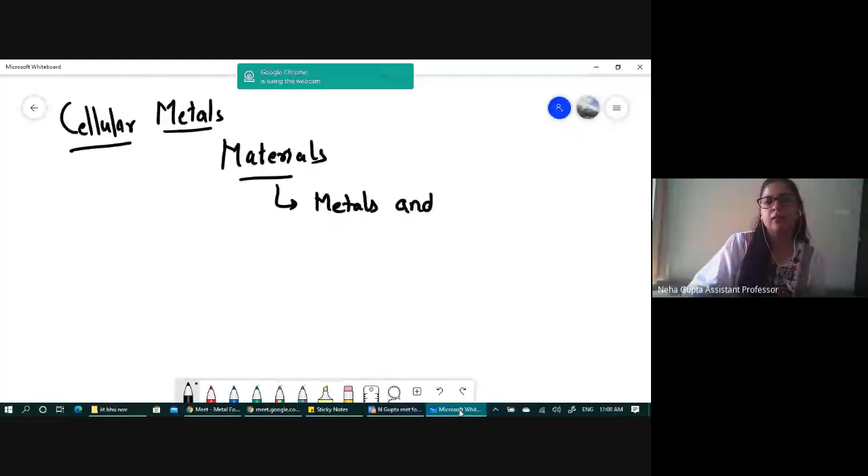So students, currently in this lecture, we will be discussing foams and lattice materials. So in material science, if we look at categories, right? So if we look at different materials, we broadly classify them as one is metals and alloys. Then we can work with ceramics. Next category can be polymers. Then can be composites.

And recently, from the past 20 years, since new and new materials are coming into picture, there are several new categories added to it. For example, semiconductor materials. Then you can do smart materials and many more. So now I'm focusing in this work on metals and their alloys. I do not know how many of you are working in the field of metallurgy, but even if you are not working in this field, still I think this lecture will be helpful for you.

And what I'm going to do is, during our discussion on these foams and lattices, I will be giving you a brief idea what we are doing at NIT Raipur and what my UG students are doing. For example, if I'm telling them that you have to develop a foam, with what kind of ideas they are coming to me and doing their project works. Okay, so all those things we will be going to discuss.

And if you look at metal foams, what is being found, especially in India, I'm not telling about across the world, because across the world the term metal foams is widely used, but people are only limited to research labs as well as academic institutions. Only we are working with metal foams, not on industrial level or in daily life applications. For example, you will be aware that we are using polymer foams in packaging, in household, all those different foams we are using, but not metal foams.

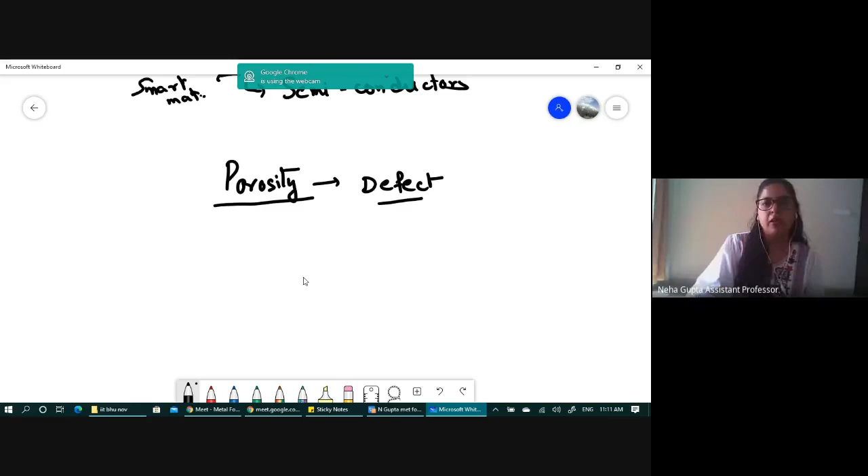So currently, if you work with material science, we use the term porosity. And if you look at the word porosity, we say it is a kind of defect. This is a common term. But now, in this lecture, I will be saying that porosity is not a defect for me, it is an advantage for me. And why am I saying that porosity is an advantage? Because nature is motivating me to work on a porous structure. Okay, let us look at some of the examples that we find in nature.

So there are basically three types of nature structures that we will be discussing in today's lecture. One is sandwich structures, next one is density gradient structures, another one is tubular structure, which is having a cellular core. So let us first understand what are sandwich structures. In sandwich structures you are having a top layer and a bottom layer, similar to your bread sandwich. And in between these two layers, you are adding some core material. So this is your sandwich structure.

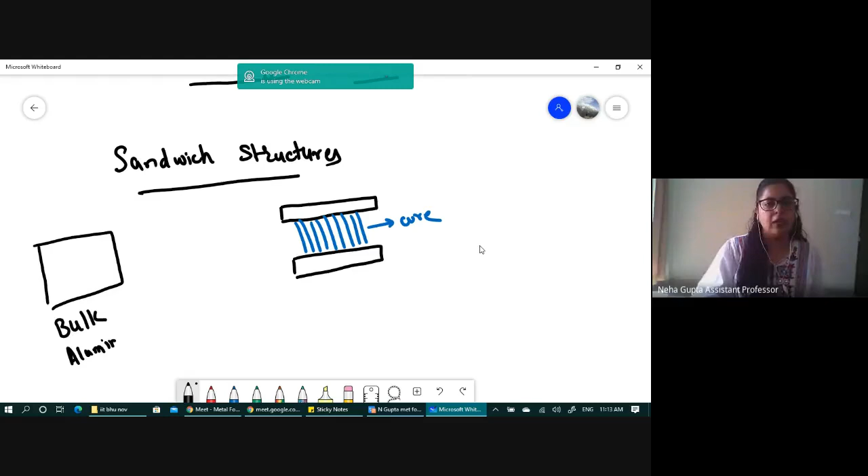So why was this sandwich structure developed earlier? Let us say you are working with a bulk metal. Let us work with aluminum, because aluminum is commonly used in market. In your household also you will find aluminum metal. So if you work with bulk aluminum, let us say its weight is some X gram. Now, rather than using this bulk material, I'm using only two plates. So I'm turning my bulk material into two plates because I want to reduce the weight further.

So what people have done initially, to decrease the weight, they wanted to use just a two plate structure. But the problem was that if you take these two plates and apply some load on this structure, what will happen? Your structure will get easily bent like this. So it means its bending strength is very poor. Though I'm decreasing the overall weight, the bending strength will decrease and also the overall stiffness will decrease.

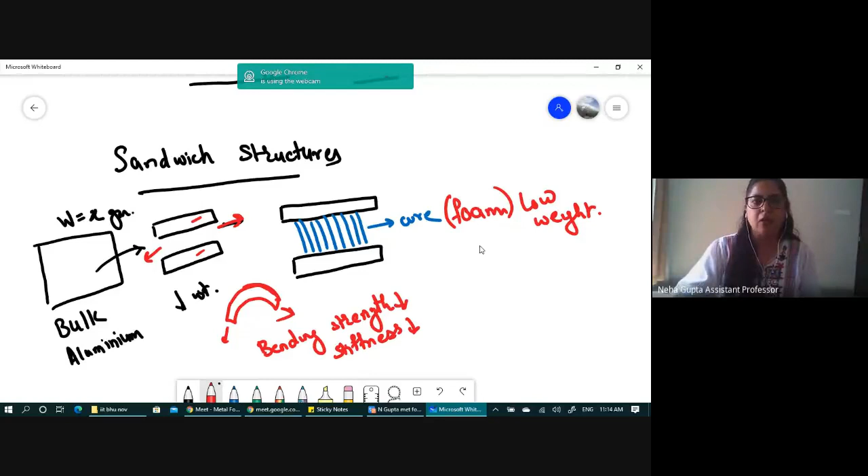So what was the solution to it? To introduce a core material here. So now in between these two plates, they have introduced a center material. This core material is generally a foam, very low weight. We will see in coming slides why we are saying it is low weight. So this core is not increasing the weight drastically as compared to your bulk material, but it is giving support to the top and bottom layers so that you can increase the bending strength and the stiffness, as well as have lower weights. Okay, so this is the advantage of using sandwich structures. So this is one structure that we will be discussing.

Another structure is density gradient structures. So density gradient structures are

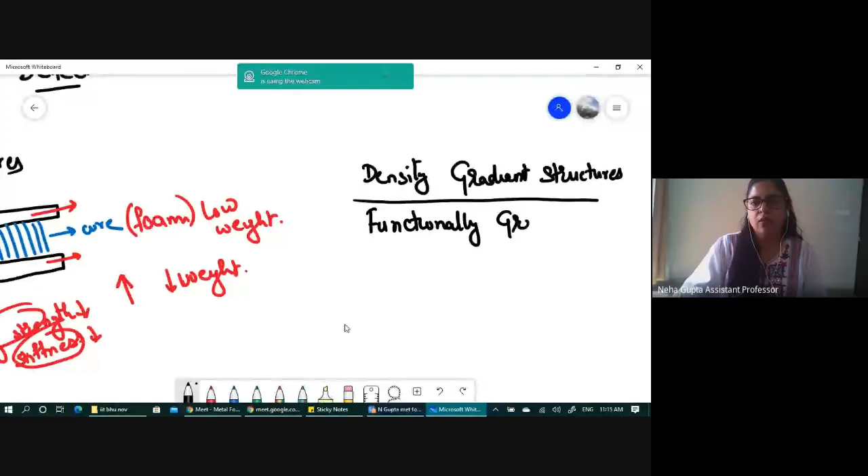So for density gradient structures, currently people are generally working with functionally graded materials, commonly known as FGMs. So in density graded materials, suppose this is your structure and let us divide this structure in three parts. In the first part, let us say the mass is 10 grams. Here you want a mass of 50 grams. And here you want a weight of, let's say, 1 gram. You want to change the density across a single structure. Those kinds of structures are termed as density gradient structures.

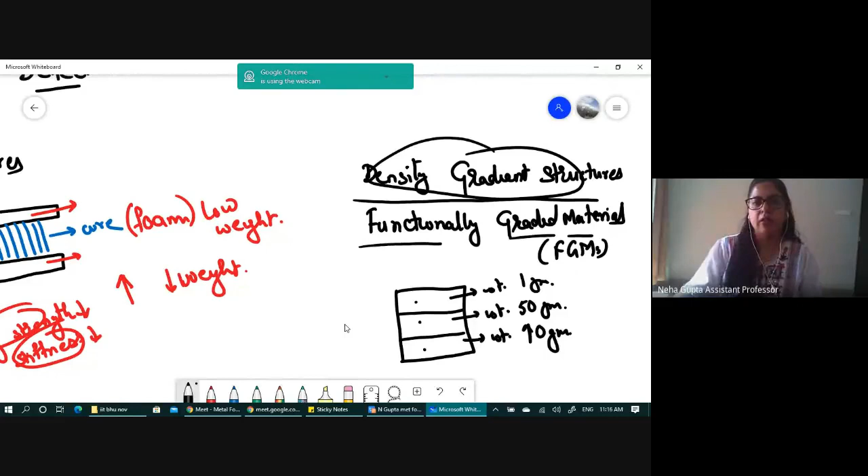Clear? And you will appreciate that as you are changing the density in these three parts, obviously their function will also change. So in a single structure, you are changing the functionality. So many people use the term functionally graded materials. All right. So this is the second category of materials that we will be discussing. Next is tubular structure, tubes. So let us say you are working with a pipe. This is a tube.

And this tube will be having some core material inside it. So these three natural structures we will be discussing, and we will see how nature is intelligent enough to manipulate the structure to get a particular functionality. Right?

Because what is the property of a leaf? There are different kinds of weather, summers, winters, springs, and all those things. Winds are blowing, sun is there. So this particular leaf has to take care of all the different kinds of heat, pressures, velocities, and it has to resist it. And this kind of structure will help this leaf to get that kind of property.

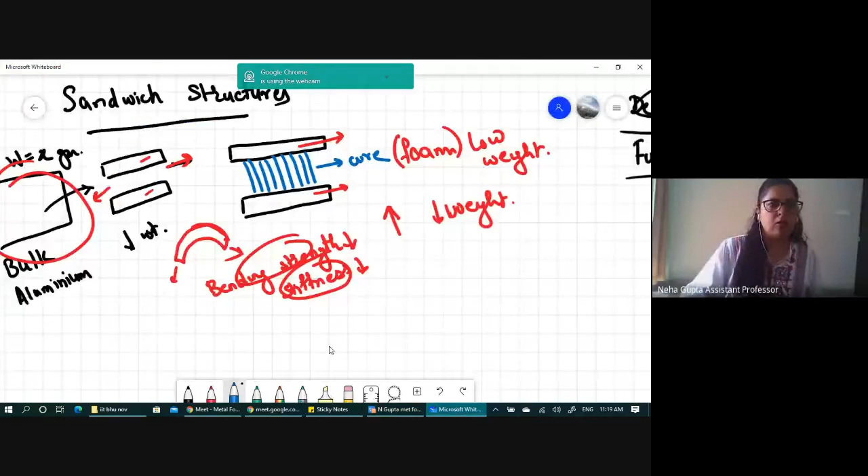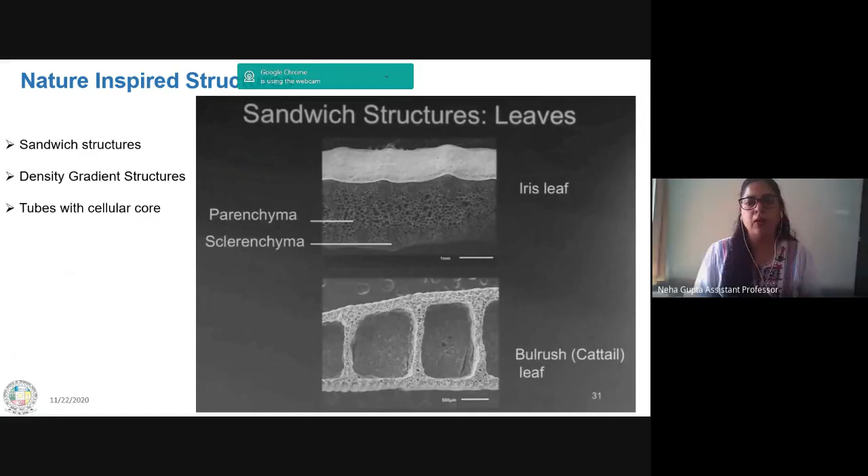So what we are doing, we are engineering our porosity. Nature is engineering the porosity to give a particular function to a material. For example, if you're working with a bird, the first thing the bird has to do is fly. And for easy flight, its body weight has to be very low.

And how to decrease the body weight? Make the structure porous, hollow. Okay, but if you completely remove the material, there will be no strength. So how are you doing the strength enhancement? By creating these kinds of beam structures or struts.

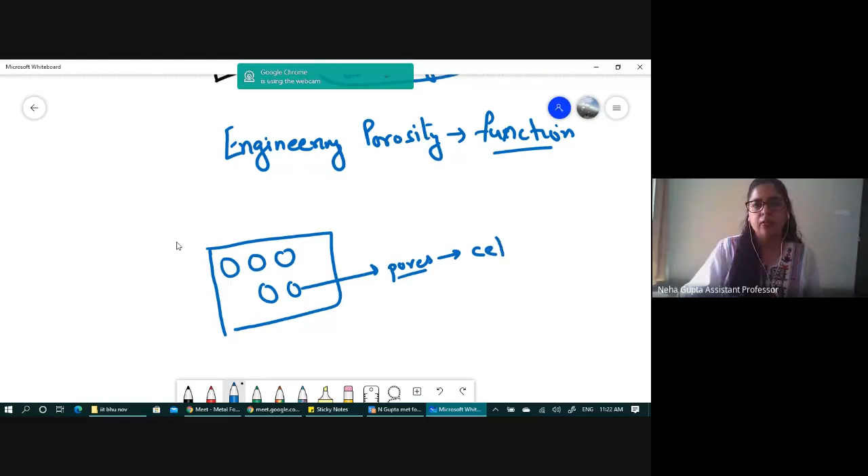Okay, so as we move forward, let us say this is our material that we want to develop. And in this material, if these are my pores, okay, rather than using the term pore, I will use the term cells. In engineering terms, I'm representing pores as cells. Now, these pores can have different shapes. They can be circular, triangular, rectangular, square, different kinds of shapes, or hexagon also.

Right? So simply what I can do in a given structure, if this is my overall structure, I can arrange my cells or porosity like this. These are my square cells. Okay, or you can use triangular cells or hexagonal cells. And the boundary, this boundary, we will call it as strut.

You can compare it, for example, you are constructing a building. Okay, so this is the bottom floor of your building, and this is the first floor of your building. Now you can easily appreciate that there might be some beams that are connecting first floor with your bottom floor. Okay, why? To give a particular support to the system. And in this building, this is the same strut that I'm talking about.

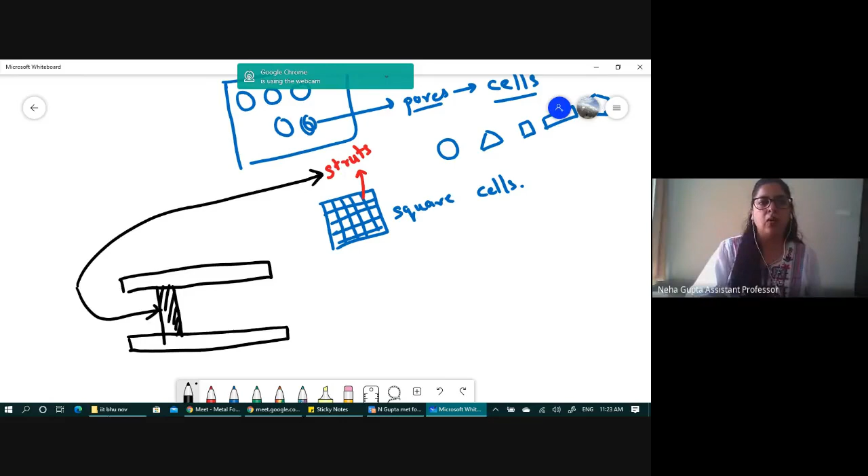To give a particular strength, you are creating some beam-like structure. And this one, this is another beam. And in my term, this is my one single cell. I hope it is clear to everyone. Right. All right.

Here the cells that are arranged are completely different as compared to that of your pigeon, because the functionality of an owl is completely different as compared to your pigeon. Owl has a different hearing capability also. And you are manipulating your material so that you can change how the sound is affecting or how the sound is entering your head.

Okay, so if you look at the skull of an elephant, it will have different kind of structure. So like that, nature is taking care of different kind of structures. It is manipulating the structures to give a particular function to that particular creature, whether it is plant, whether it is pigeon or any other mammal.

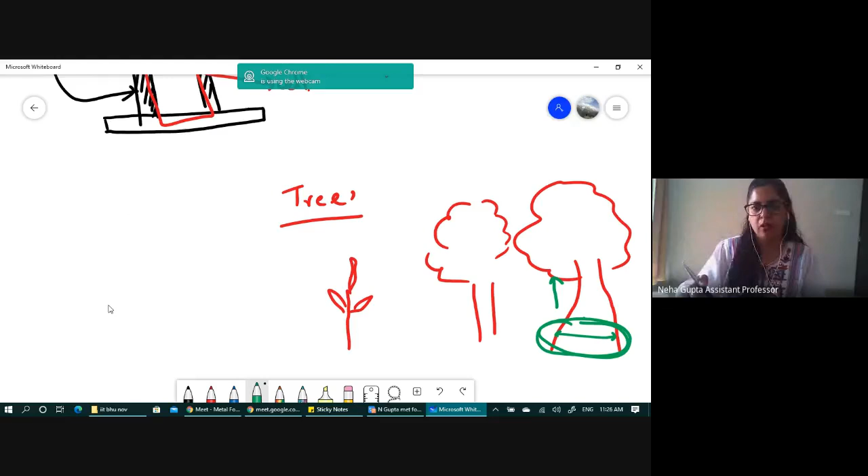Now what will happen if you are taking a palm tree? Okay, the bark of this palm tree, you will find it is completely straight. From bottom to top, it is not taking this kind of shape which I have shown. Rather it is taking this kind of shape, and here are the leaves. And why it is not getting this kind of trunk? Reason being, this tree is manipulating its cell structure. Let us look at it.

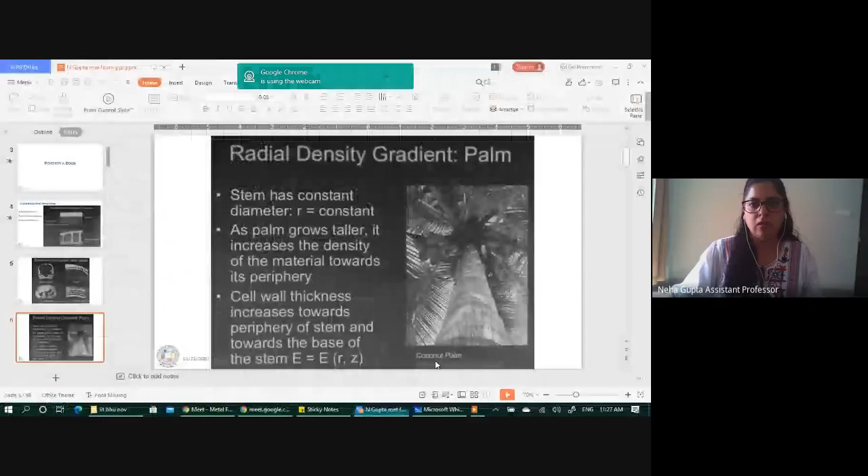So this area is old, this is your new area, right? Because the growth is happening in this direction. So I'm comparing this structure with the new structure or young structure. So what palm tree is doing, rather than increasing the size of its trunk, it is increasing the size of its strut or boundary of the cell. Here the boundary is less in the young plant, and here the boundary is more. So like that, it is accommodating the weight, and it is not increasing its overall structure.

That's why the palm tree is like this. Okay. I hope it is clear. What is density gradient? So here in the top area, density is different. Okay, because the strut size is small. This is the boundary. And here in the bottom area, the density is more. It means the strut dimension is more. This boundary area is more. Clear? So these are the examples of density gradient. So nature is already taking advantage to create different kind of structures. Okay.

Now this is an example of tubular structures. So now let us take an example. There is a glass of water, and in this glass of water, you are sipping it using some straw. This is your straw. Now you will take this straw and simply bend it. What will happen? The straw will take this kind of shape after bending.

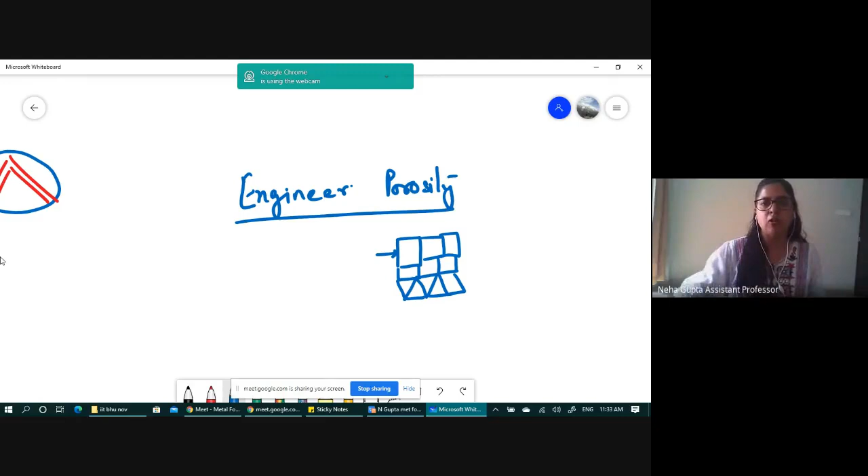When I talk about engineering of the porosity, it means whatever cells I am creating. For example, this is a cell. So let us say I'm working with one kind of cell structure, it is giving me some property. I can always modify another layer of cells like this, or let us say like this. Right? We see it in engineering applications. In many civil applications, they are taking care of different cell shapes to get a particular strength of that particular construction that they are doing. The same thing we have to do on a smaller scale, on the scale of our materials. You have to arrange your atoms somewhere here, something like this. Okay.

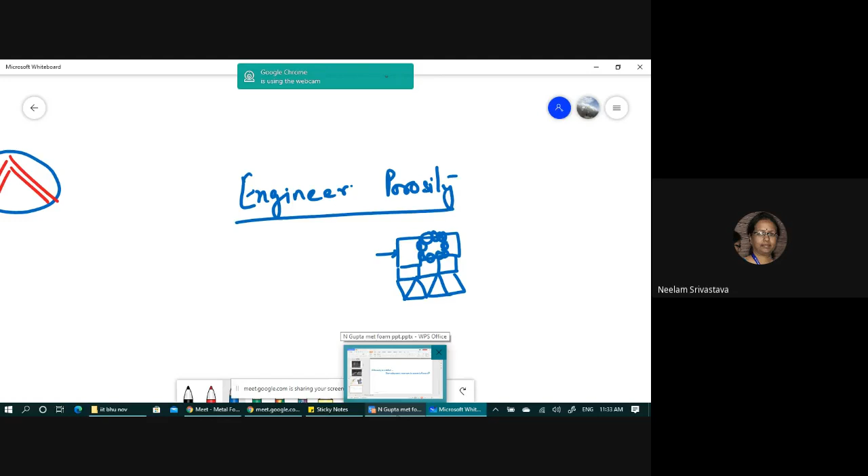If there are any questions related to whatever we have discussed, we can take it now. And next we will. Actually, we have requested, sorry. Let me. We have requested the students not to interfere in between because this video is on YouTube. Okay. So they will ask the questions at the end only. Yeah, sure. Okay.

So now we understand that porosity, we have to simply engineer it. And now people have engineered this porosity and they have developed engineering cellular solids. Okay, so there are two categories of engineering solids. One is honeycomb structure, another one is foam structure. So in honeycomb structures, there is a regular arrangement of these cells. For example, this is a regular arrangement of hexagonal cells. Here you have a regular arrangement of square cells. Here you have a regular arrangement of triangular cells.

But in comparison, foam has an irregular arrangement of these cells. So this is one of the major differences between honeycomb structures and foam structures, right? So what we have done, we have engineered the porosity, and now people have developed two categories of materials. One, they are calling honeycombs, another foams. And these honeycombs have a regular arrangement of cells.

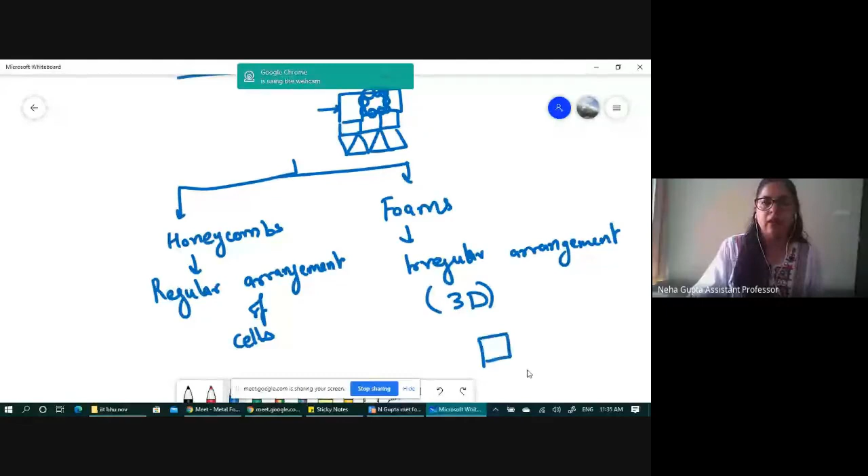And in this, you are having irregular arrangement. And another thing that I want to add here is these foams are 3D structures, meaning they have length, width, as well as depth. Okay, and these honeycombs are 2D structures. Now, when you turn your 2D honeycomb structures into 3D, we call them lattice structures.

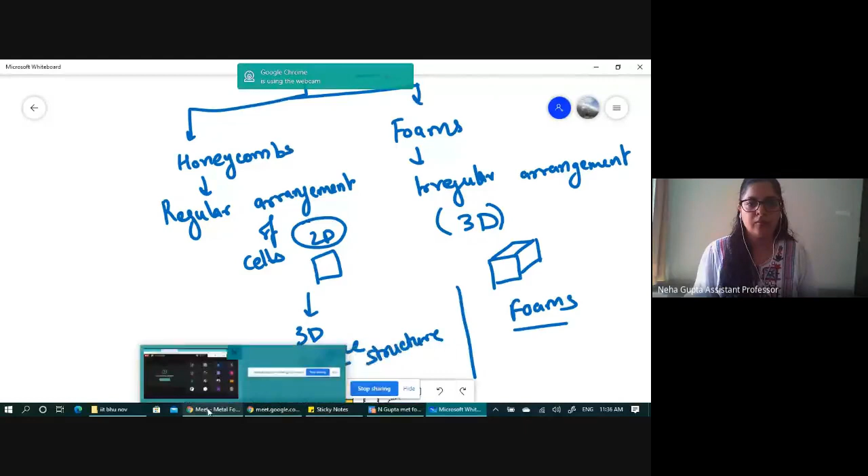Clear? So this is the major difference between foam and lattice materials. Foam, irregular structures; lattice structures, regular structures. Clear? All right. So you can follow this reference. I have taken this slide from work by Lorna Gibson. She is faculty at MIT and she is working with cellular solids. So I have taken these examples from her work only. So you can refer to this reference to understand more on this one.

All right. So now we have understood that cellular solids are of two different types: honeycombs, which can be turned into lattices in 3D, and foams. Now, what kind of property advantages do we get when we work with this kind of cellular solids? These kinds of solids we are terming cellular solids. We have engineered our porosity to develop a cellular solid.

And the property, first thing is, I'm getting a very good stiffness along with low weight. We have already discussed the advantages of sandwich structures. Okay, so due to this good stiffness and low weight, you can use it in structures of sandwich panels, or for example, you want to develop some boat where buoyancy is required. So those kinds of devices or structures you can develop using these kinds of cellular solids.

Another advantage of using a cellular solid is it can absorb a large amount of deformation. So let us say I want to develop a car bumper. Okay, so what is the role of a bumper? For example, if my car crashes into some structure, the load which is getting transferred by that crash to my car body should be taken by that bumper. The bumper should get destroyed during a crash and nothing should happen to my car. So it means the bumper should absorb all of the energy. So this kind of large energy absorption can be easily obtained using a cellular structure.

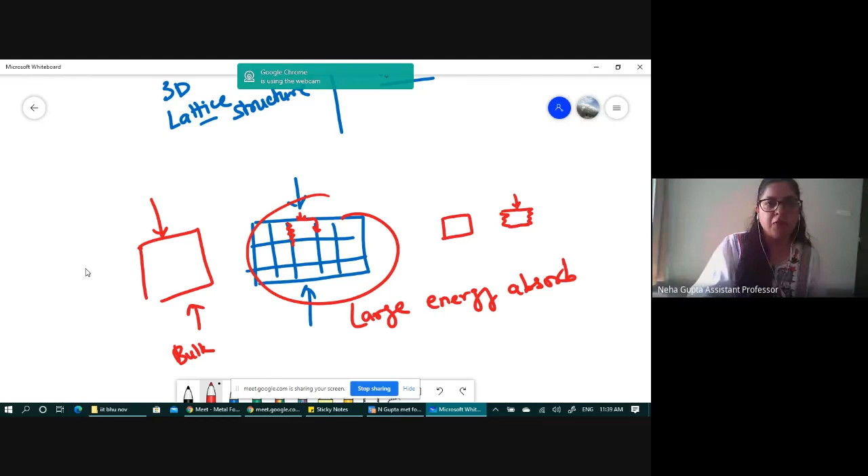Okay, so due to this, this whole structure can absorb large energy in comparison with doing the same compression on a bulk material. Because in bulk material, everything throughout the structure is changing. But here, load is getting transferred to get this kind of cell modification. Okay, buckling. So this is another advantage of using a cellular structure. Due to this advantage, you can use it for energy absorption devices like bumpers, helmets, or energy dampeners.

Another advantage of using a cell structure is that using the same material, you can develop low as well as high thermal conductivity materials. What does that mean? In the coming slide, we will discuss two different kinds of cell structures: one will be open cell structure and another one will be closed cell structure. And once we go into that topic, you will understand that when working with open cell structure, thermal conductivity is very good.

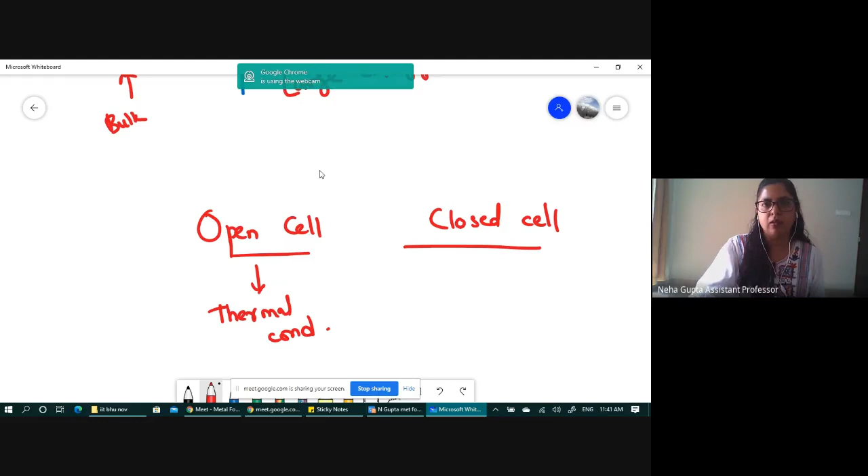Though the material is the same, you have adjusted the cell in one case as open, in another case as closed. If you're working with open cell, you can increase the conductivity, but the same material can be made an insulator if you're working with a closed cell structure. Okay, so just by designing your cell structure, you can make your material a conductor as well as an insulator.

Now, since you're working with cellular structure, porous structure, obviously the surface area that the material is occupying is much, much larger. So obviously when the surface area is more, you can use the material for catalysis purposes. Right? So it can be used for applications such as catalysis.

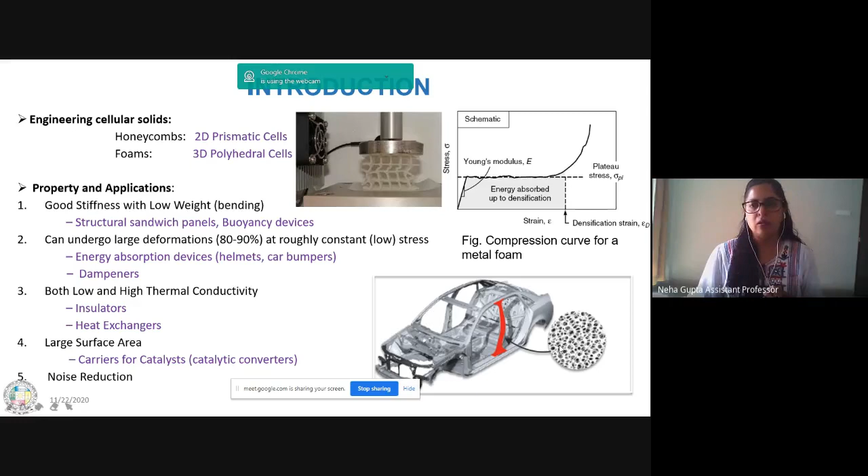And also it can be helpful for noise reduction because in the pores, or if this is your foam, which is shown as a car body here. Okay, in this foam, in the gaps, what is entrapped? Air is entrapped. And this entrapment of air within the material will help you in getting a good noise reduction for the structure. So these are some of the common applications depending on the property that one can achieve using this kind of cellular solids.

So generally speaking, a person will go with development of cellular solid if along with the structural property, he wants to introduce some functional property. For example, I want to get a good strength or stiffness, but along with lower weight. I want to have a good structural property, but along with catalysis property. Or I want to have a good thermal transport, but along with good structural strength. So if you want to have some functional property attached along with the structural properties, people generally go with cellular solid material. Okay, I think this is clear.

Now, whatever different materials we have discussed in the starting of the lecture, polymers, ceramics, metals, composites, all those things, you can create foams out of any kind of material. But in my lecture, I will be discussing specifically metal foam because I belong to the metallurgy field. And this kind of metal foam is also known as metfoam. So what advantage am I getting? Rather than getting a 100% material, I'm taking solid metal only up to 25% volume. Rest is air. So very light structures can be developed if I'm working with metal foams.

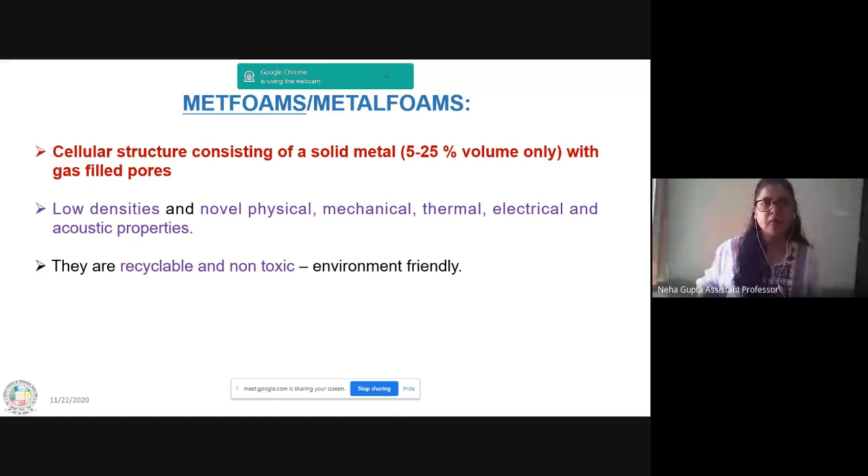Right? So in open cell, your cells are open. I have a structure also; I will show you. So I'm holding an open cell structure with me. Though it is a regular structure, it can be an irregular structure. If it is a regular structure, it is a lattice material. So this is an open cell structure that I'm holding in my hand. And this second structure is closed cell. Because if this is your material, how does the closed porosity look?

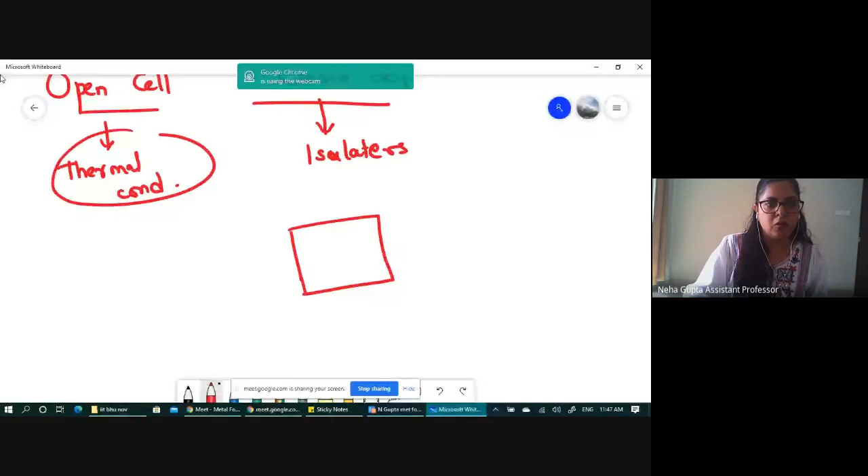So in open cell, let us compare two different materials. First, let us work with closed cell because it is easy to understand. So this is my 3D model. And if there was some porosity inside this model, it will be inside this one. Okay. And if I simply section out my material, let us say I'm cutting my material here, so how will it look? It will appear as this closed cell. I can see the other half as closed and the front part as open, but actually it is closed.

All right, but in open cell, the porosity is such that the fluid can pass through this 3D structure. So when you are able to pass the fluid, you can get the advantage of thermal conductivity. And here in the closed cell, since the fluid is getting entrapped inside the structure and there is no fluid flow, we say that this kind of material can be used for insulators.

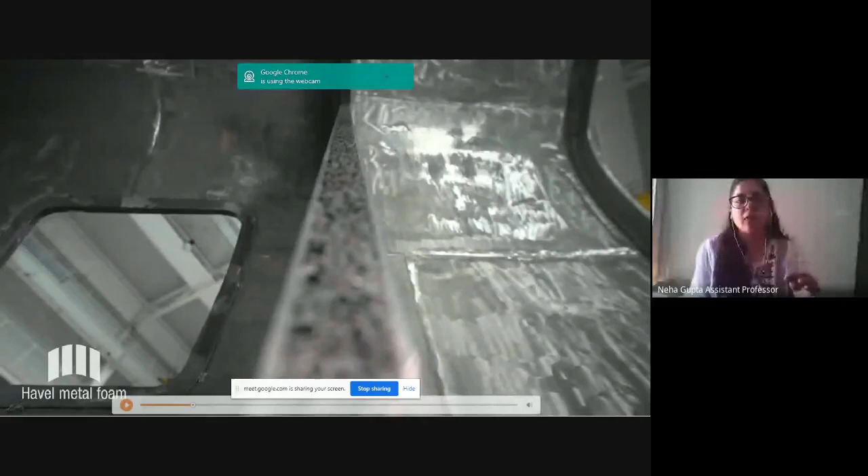Right, so this is the outer body. This is the whole body that is being developed, and these are the sandwich structures they have arranged. Simply by using a sandwich structure, they have drastically decreased the weight so that speed enhancement can be achieved for this train. So this is showing the weld. You can simply join the two structures by a simple welding or joining technique.

So now it is clear that we can use foam material to construct very huge structures. We are not limited to working on smaller size materials.

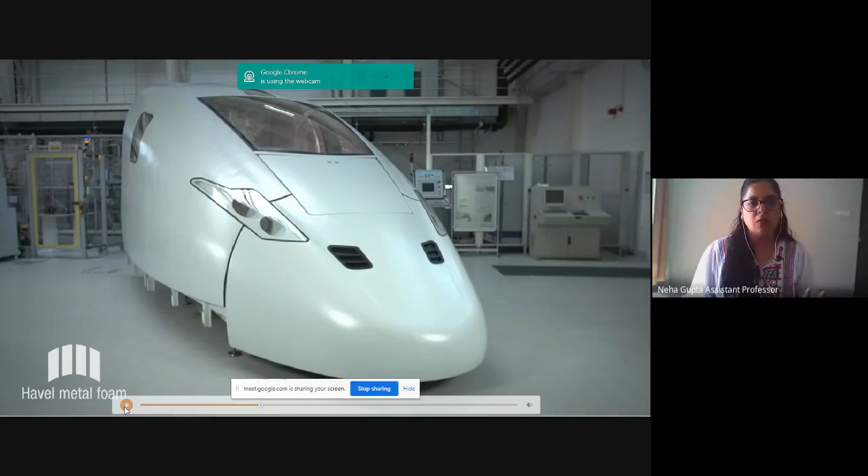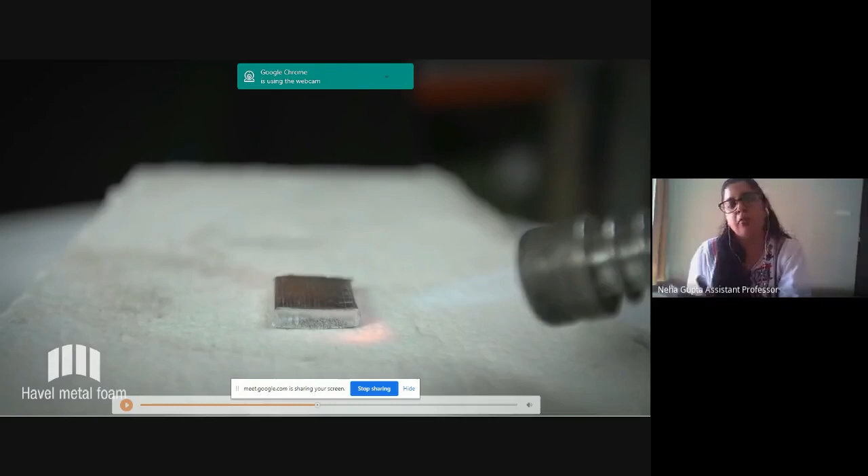You can go with the industrial scale. That is okay with us now. Okay, so this is how the foam is being created. As we will see in further lectures, by simply heating this material, it will turn into foam.

Very lightweight, so you can use it for buoyancy applications. So in this example, they are taking this plywood and checking whether this cup will break or not. In the next test they will replace this. Plywood is a common packaging material, right? So they are trying to replace the packaging material with a metal foam.

So now, along with buoyancy devices, you can use it for energy absorption, for example bumpers, or for food packaging also. After food packaging is done, you can simply recycle the material.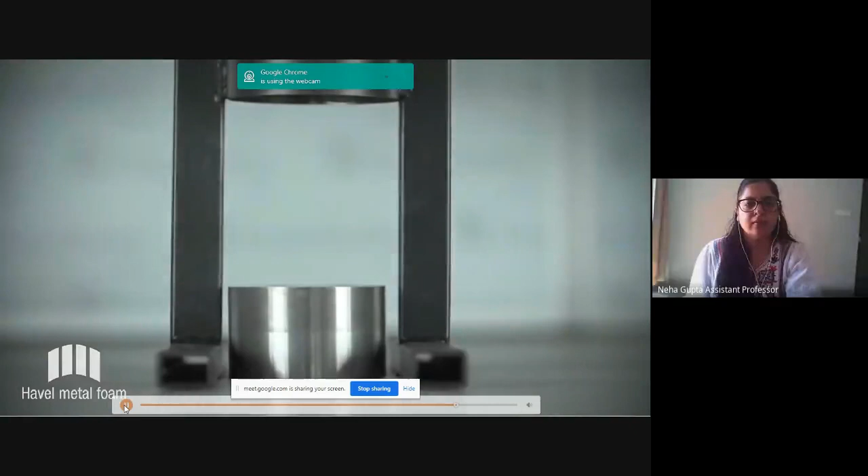So vibration control. Okay. So in this video, you might be able to appreciate the different kind of properties this foam is able to give us.

Now, if you want to develop this kind of cellular material, there are some properties that you have to keep in mind. Firstly, obviously, is the kind of material. For example, if I want to work on some metal, I can take aluminum, I can take titanium. Titanium is good for developing human bone replacement parts. Okay, so aluminum will have different property as compared to that of titanium. So first thing is the property of the solid, aluminum or titanium. Your final property will depend on those properties.

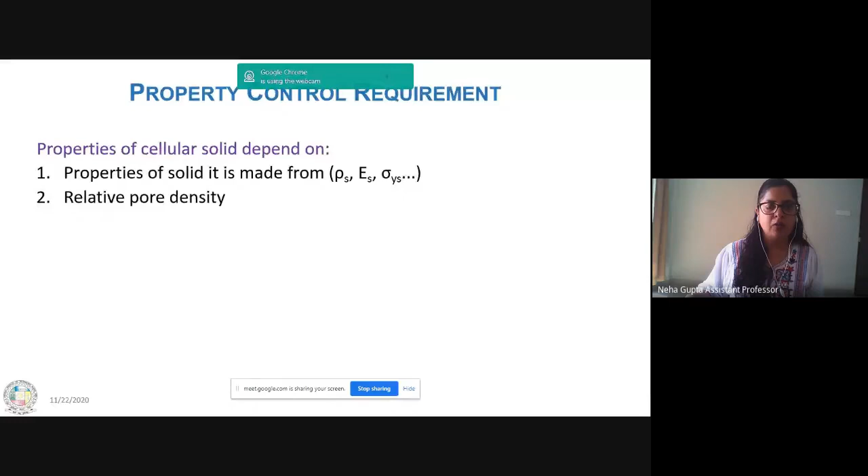Next one is how much porosity is present, how many cells are present in a given volume. That is important. That will change your final structure. Which kind of cell size and shape you are working with. Okay, small, for example, 1 mm diameter cell size or 4 mm diameter cell size, or whether you are working with square cells, triangular cells, spherical cells, those will change the final property of your material. And again, whether you are working with closed or open cells, they will also change the final behavior of your particular foam.

Now let us look at the different production methods that you can work on if you want to develop this kind of metal foam materials. You can use vapor techniques, liquid techniques, solid techniques, which is powder technique, or some ionic technique. So whatever setup is present in your lab, you simply have to modify it slightly, and you can prepare your metal foam.

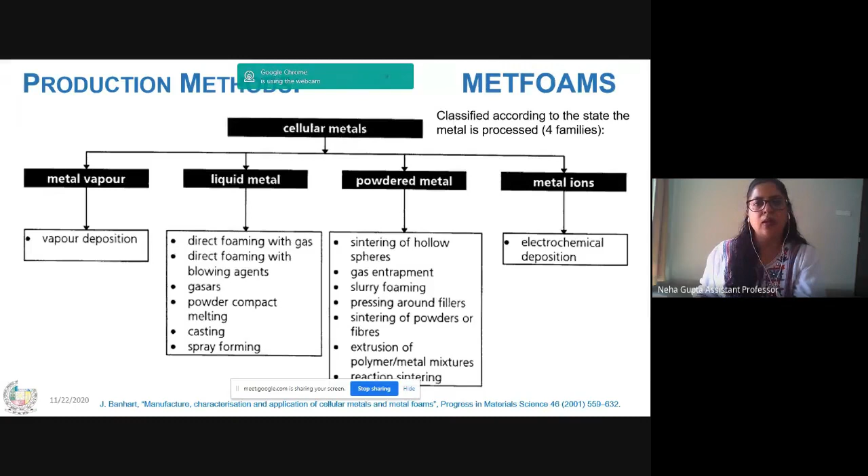All right, so we will start with our liquid metal technique. In liquid metal technique, obviously we are taking our initial metal. For example, aluminum. Why am I focusing on aluminum? Because aluminum is one of the common materials that gets recycled. Aluminum cans you are using. There are different window structures that are made up of aluminum. So a lot of aluminum is already available with us as scrap. You simply have to remelt it, and after remelting, you can develop it in the form of foam. So in liquid technique, we will take liquid aluminum to develop a structure.

Now in this liquid technique, you can use again different techniques: direct technique, indirect technique, powder technique, casting methods, and spray forming. Now I seriously love the first two techniques, and I will rename them in my own terminology. The first technique is foaming by gas injection. And my name for this is the soap bubble technique.

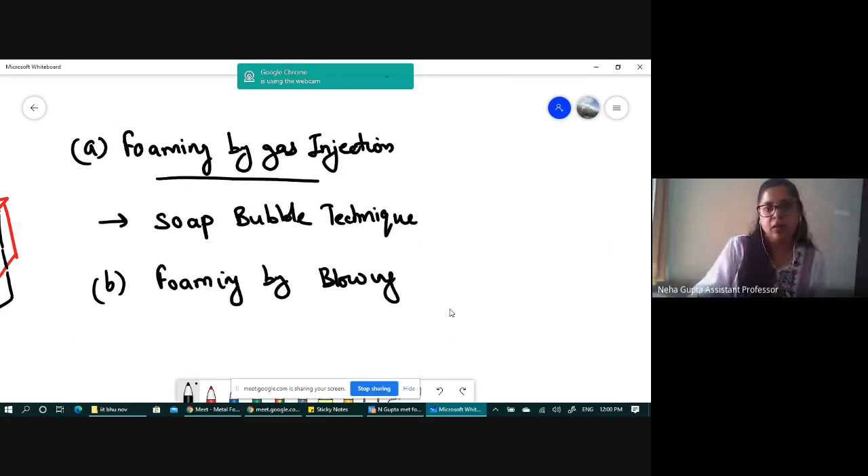So this is that soap bubble technique. I simply have to blow air to create a foam. And my next technique is foaming with blowing agent, which is the indirect technique. So my second technique is foaming by blowing agents, and I will say this is my cake baking technique. Okay, so I will simply bake a cake with you now, and I will simply blow air in a soap solution to develop my material. Okay.

So let us start with our soap bubble technique. Imagine this is your container in which you have placed your soap solution, and with this straw you are bubbling air. So what will happen? The air will rise as gas, and it will take this liquid along with it, and on top of the surface of this container you will get some foam, and here you are using some conveyor belts to simply collect those foams. Clear?

Now, how have I modified my setup? Rather than taking a soap solution, this is my aluminium solution, aluminium in the form of liquid. I have melted my aluminium metal and have placed it in this container. Using this kind of injector, I am purging some gas. Your gas can be oxygen, CO2, hydrogen, nitrogen.

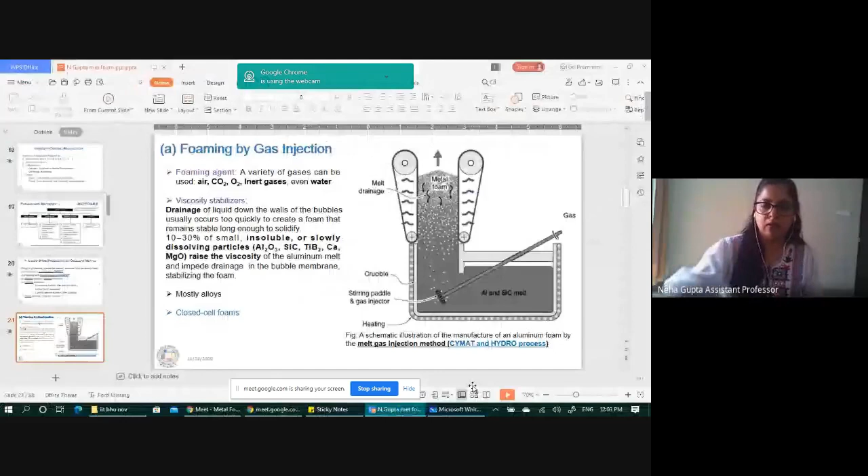Okay, let's try to understand. I have taken a container. In this container, I'm taking a soap solution. This is my soap solution, and the bubbles are rising up like this. So this is how I'm getting foam. In between the foam, what am I having? This liquid. In between foam, I'm having liquid.

And as the foam is rising up, the bubble will get destroyed or collapse. So bubble collapse happens due to drainage of liquid. Liquid is the soap solution. So liquid is draining and the bubble is expanding and it is completely getting collapsed. So if somehow I can work on drainage of this liquid, then I can hold my bubble here for a longer duration till I can solidify this bubble solution.

Okay, so what do I have to do? I have to solidify this zone. But during solidification, due to the drainage issue, bubbles are simply getting collapsed. So if somehow I can make this drainage stop for some time, I can hold the bubble for a longer duration till it is getting collected. For that, I will increase the viscosity of this liquid. If I increase the viscosity, the liquid will stay here for a longer time in between the bubbles, and the drainage will be less as compared to normal drainage.

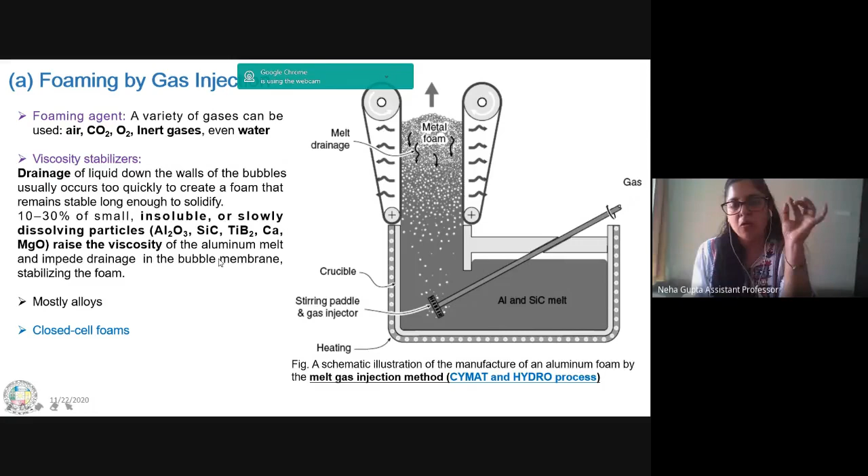For example, in this zone where you have placed your conveyor belt, you are giving cooling treatment, right? So look at the bottom surface. In the bottom surface, there are fewer bubbles as compared to the top surface. So what kind of structure am I getting here? Density gradient structures. If this is my structure after cooling, here I am getting a lot of bubbles, here the bubbles are slightly less, and here fewer still. Gradient structures.

These gradient structures are not always useful for a given application. Depending on the application, you have to check whether you want to go with gradient structures or not. Because if you apply a load for a general application, the load distribution on the bottom side will be different as compared to the top side. So the material will behave very differently, not homogeneously, and you will not get the optimum property the material should have given to you.

So if the application demands that you develop gradient structures, then please go with this technique. Otherwise, people try to avoid this technique because you develop non-homogeneous structures. Let me give you one example to understand how the property changes for homogeneous and non-homogeneous structures. I will give you two comparisons.

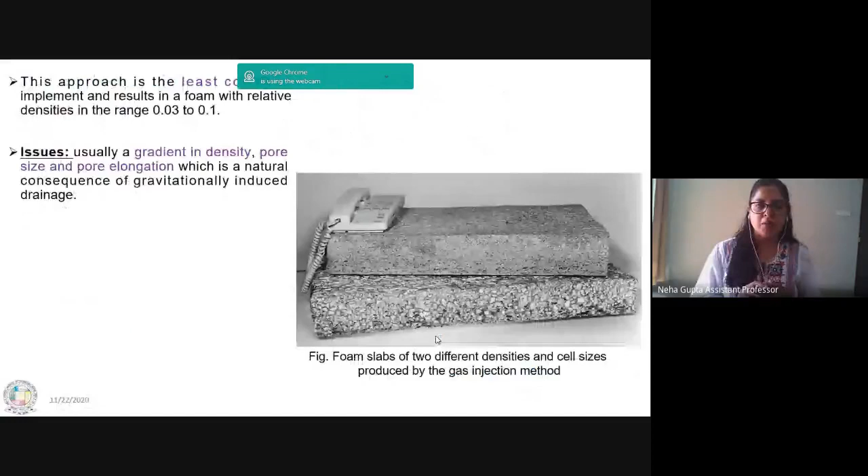Now next is our cake baking process. In metal foam language, it is the Alporas process. So let us see how we will bake a cake. You will take a container. In that container, you will add some liquid, whatever flour liquid you have to add. Okay, now in this flour liquid, you add baking soda.

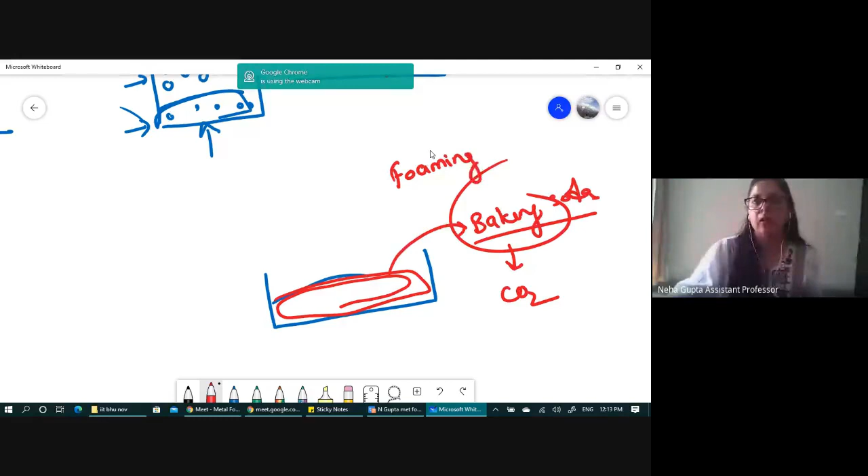Why are you adding baking soda? Because baking soda releases CO2 gas. Okay, so during the cake baking process, my baking soda will act as a foaming agent because it is creating gas. Clear? So the same thing we are doing in this technique.

So we have taken, this is our furnace. In this furnace, I have placed my crucible. In that crucible, I have placed my aluminium. In the aluminium, I have added some viscosity enhancer so that I can get some viscosity. And now I am using a mixing propeller.

Now I am adding, in this second figure B, you can see they are adding titanium hydride as a foaming agent here. So what will happen? At some temperature, this titanium hydride will release hydrogen gas, which will create bubbles inside your liquid. So in figure C, you can see bubbles are being created.

And slowly, in that whole container, the foam will be seen. These bubbles will be seen everywhere. Earlier, due to drainage problem, you were getting a density gradient inside the structure. But when you are using this kind of second process, which is an indirect route of generating a gas, you will get a very good uniform distribution of porosity inside your material, as compared to the earlier technique.

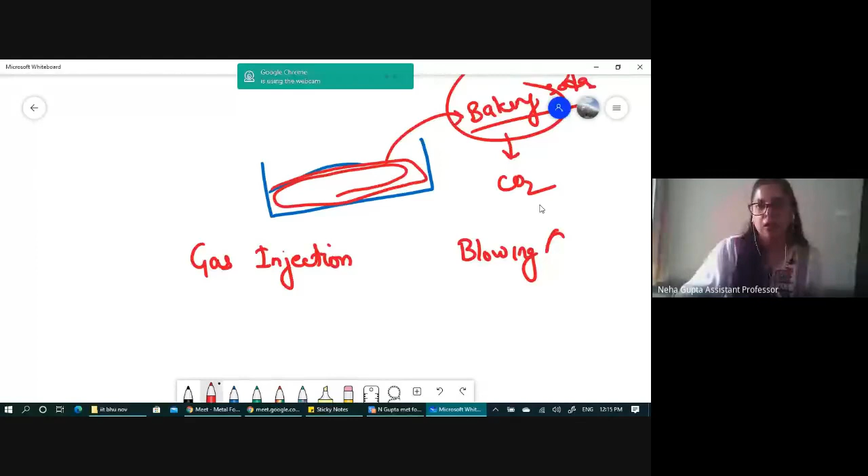Please note, we are saying as compared to your initial technique, which was your gas injection technique or soap bubble technique. If you are using a blowing agent, here we are using titanium hydride. Here we were using air. So just like baking soda, you are adding titanium hydride. In soap bubble technique, you were blowing air.

So here you were getting a density gradient in this structure, but here, in comparison with the gas injection technique, the density is much more homogeneous, but not homogeneous throughout. But better as compared to the previous method. So now we are in the second stage. Now the problem with this: people are still not able to achieve a very good uniform distribution of pores inside the material. Still there is a problem with this one.

So currently people are trying to uniformly control it. Means I should be able to get uniform distribution of my pores throughout each and every corner of the structure, because only then can I match my experimental property with my theoretically predicted property. So when I discussed this with my BTech students, they told me, "Ma'am,

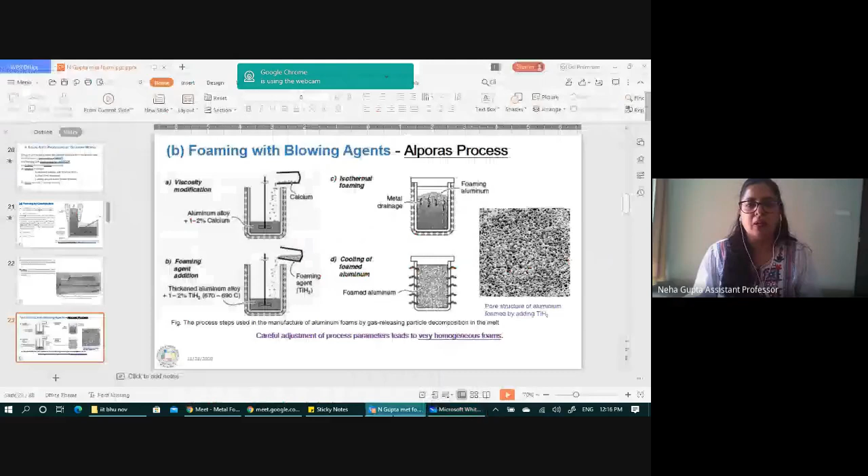So that thing I want to discuss with you. I have given those students some brief knowledge, and they have identified that, "Ma'am, if we are able to know how the viscosity is changing, then obviously we can control the pore velocity. And if we are able to control the pore velocity, then we can know where the pore is exactly located at a given time." So they have identified some of the variables.

So let us again go back to the cake baking process. Now, what is my structural requirement? Why am I giving you the example of cake baking? Let us say you have gone to bakery number 1 and bakery number 2, and in both bakeries you have ordered fruit cake. You will be amazed, the same fruit cake from one bakery will taste different compared to the fruit cake from the other bakery.

Reason being, the type of foam created in the cake from bakery 1 will be different compared to the foam created in bakery number 2. Though the ingredients and raw materials are the same, just because the pores are distributed differently in a given cake, the taste will be different. Because how is the taste developed? Your jaw crunches the material, so you are applying a crushing force on the material, which helps develop the taste.

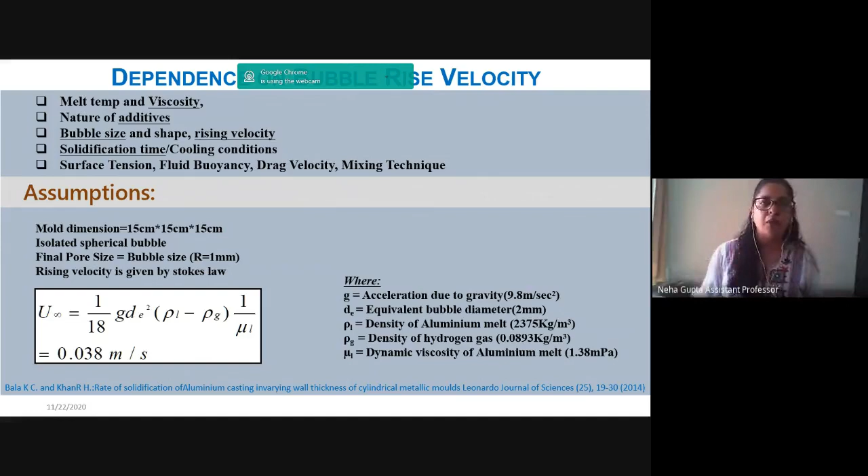And using Stokes' law, they have tried to understand for these particular dimensions, if they want to have a pore size of 1 mm, what should be the velocity of that bubble? So using that, they have identified the velocity of the bubble. So this is the mold, this is the container. Okay, so 15 by 15 centimeter. Using Stokes' law, the initial equation, now they know the velocity with which the bubble might be rising, where the CO2 bubble will be at a given time when you have added baking soda.

And they have identified that if you have given 30 seconds of solidification time, with this kind of bubble velocity, the bubble will rise up to more than 1 meter, which is much higher compared to the height of the container. So what will happen? All the CO2 will go off and nothing will remain inside the cake. When nothing resides inside your cake, then you will not get a porous structure.

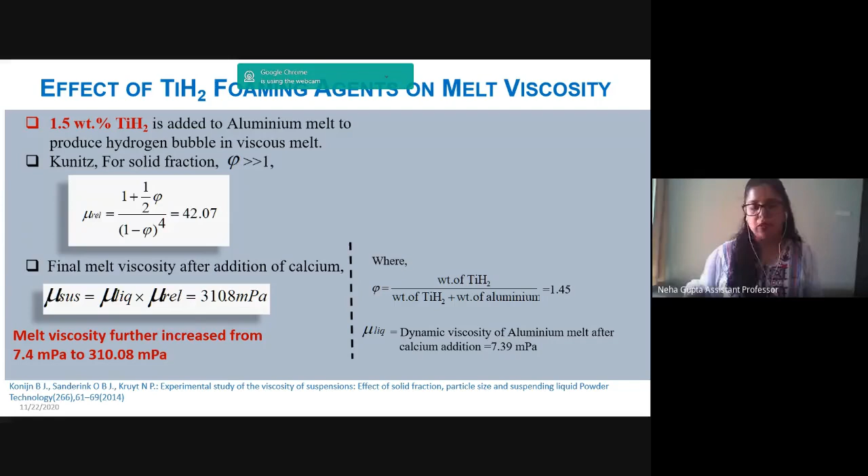Okay. And again we were surprised when we were adding the foaming agent. For example, when you add baking soda, again it will change the viscosity of the material. Not only the addition of calcium changes the viscosity; when you add a foaming agent, because you are adding a second material, viscosity will again change. So again, you have to calculate the velocity change with whatever material additions you are doing. So all those things they have done, and they have tried to understand how much viscosity enhancer one has to add in a given volume size of a container for aluminum material.

So they have now given a statement that if you are adding, let us say, 2.79 volume percent of calcium for your given volume size, then you will get very good uniformity inside your material. Or if you change from calcium to alumina, choosing some other viscosity enhancer, how much addition you have to do. Okay, so all those different kinds of calculations they have done.

Please note, all these studies are being done by BTech students, okay, UG students. So I'm just sharing with you so that you can also know these are very simple calculations that one can do. You simply take the problem that you work on, you find the relation, and then you simply correlate.

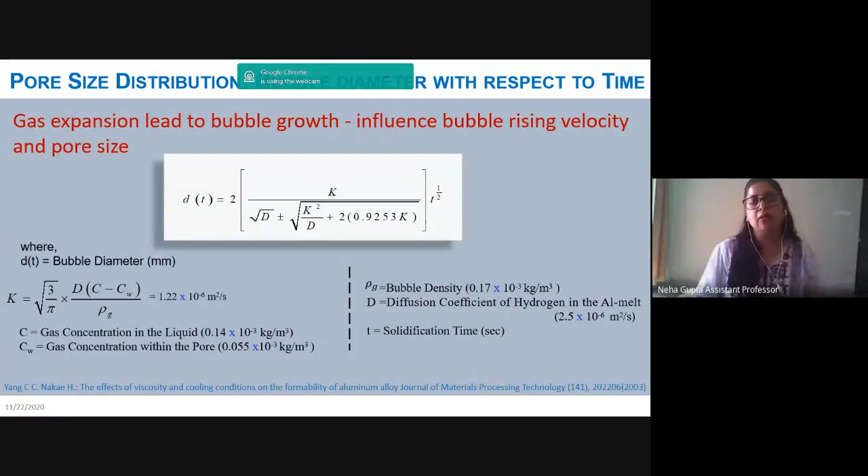Okay, so like that they have done several studies, and they were able to understand, for example, this is their final result, that if they are giving a solidification time of only 8 seconds, then only they will get a very good foam. Otherwise, you will get a non-homogeneous foam. So this was the overall conclusion of their studies.

Okay, I hope you are able to understand what kind of study work you can do, and your main idea behind this study is to get a uniform distribution of porosity throughout a given material volume. All right. So we have discussed till now two techniques. Now coming to the third technique.

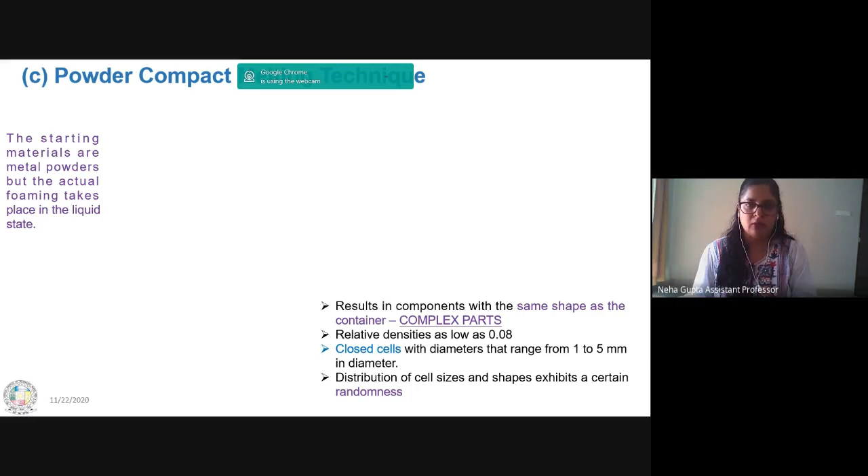In this technique, we are taking the powder metallurgy route. So the powder metallurgy route in materials engineering we use when we want to develop a very complex structure. For example, whatever is the final shape I want to develop, that's why I want to go with the powder metallurgy route. So again, my raw ingredients are the same. My base material is aluminum powder.

In that aluminum powder, what I have to add? I have to add a viscosity enhancer. I can add it or not; because I'm using a powder technique, I can skip the viscosity enhancer also. The important ingredient is the foaming agent, titanium hydride. Now you will simply mix these two powders, metal powder and foaming agent.

You will compact it, simple powder metallurgy route. And after compaction, you will keep it for heating. Okay. And when you keep this in a furnace at some temperature, the foaming agent will release gas. When it releases gas, you will develop this D diagram. You can see the foam is being created after the release of gas when you have heated this kind of powder compact.

I'm not sure, because I was told that you are not able to see my video, because I'm having samples with me which we have developed using this powder metallurgy route.

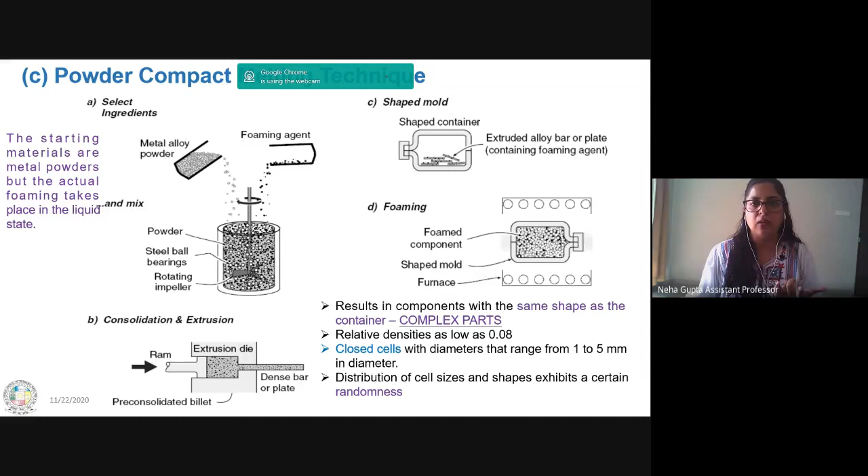And here somewhere you are getting a collapsed pore structure. So now what happens when you are developing any kind of pores? So this is the volume. In this volume, you are having some pores, and the property of a pore is you are having gas in it. The property of gas is gas always expands with time.

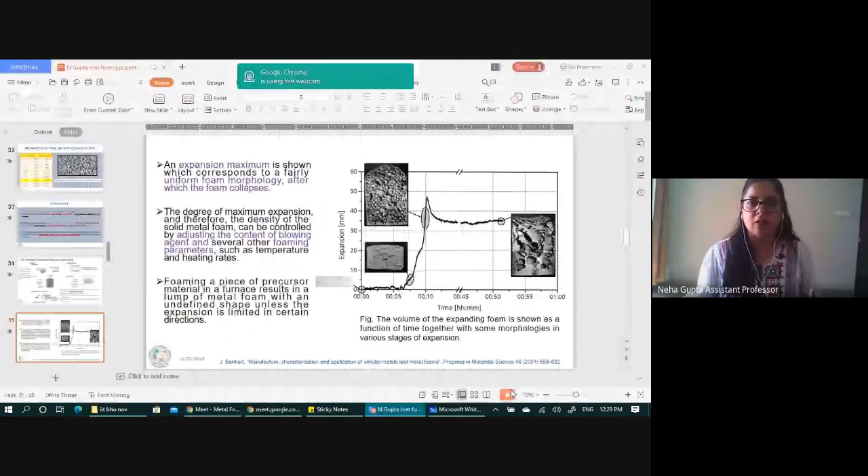Okay, so as you increase the time, this gas bubble will expand, and slowly this second gas bubble will also expand, and after some time these two gas bubbles will merge into a single pore, and the pore size will increase. So this is the same thing being shown in this last stage, studied by J. Banhart. In the last stage, the pores have collapsed because they have given more time.

So like this, they have identified what time they have to give so that you will get a homogeneous distribution of porosity. So these are some of the studies that you can always perform in your labs. Okay, so this was using the powder metallurgy route. Next one is general casting methods. In metallurgy, generally people work with casting of metals.

Okay, so in casting of metals, this kind of route people use when they want to develop open porosity. Till now, whatever methodologies we have discussed were giving you closed cell foams, and now we understand closed cell foams are used for applications that are structural in nature.

And you want to go with open cell pores when you want functional materials, for example, catalysis, heat transfer, all those things. So if you want to work with those kinds of application materials, then you can use casting methods. Let us take these methods one by one. Very simple methods I will show you that you can do anywhere.

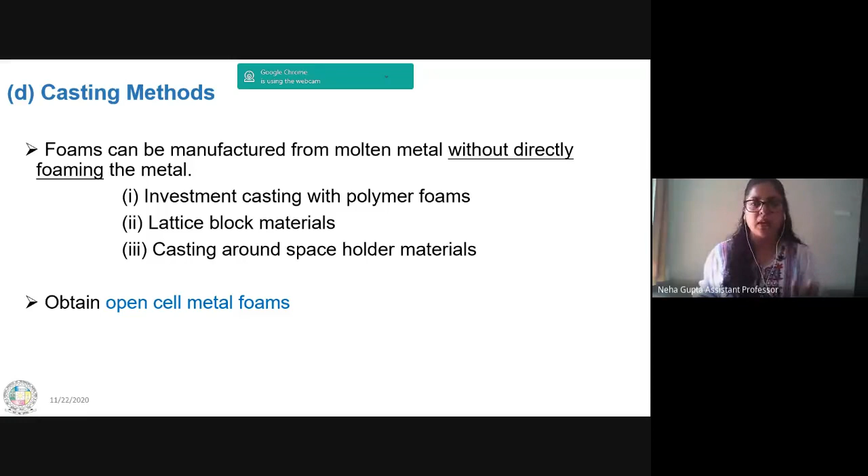First one is your investment casting of polymer foams. So what I will ask you to do is take a normal kitchen scrubber. There is a plastic scrub, which is having some cell or some porous structures. Simply take that. Okay. So they have taken this scrub polymer structure, and they have prepared a sand slurry.

You take a sand, mix it with liquid, and add some binder so that sand can hold on to each other, and simply pour that slurry. So slurry will fill up these gaps in between this porous polymer. Okay. Now you will simply heat this overall structure. So what we know about polymer? Polymer is CH bond.

So since it is CH bond, at some temperature, it will form CO2 and hydrogen, H2O, and it will simply vaporize. So you are heating it so that whatever polymer you have used will simply go off. So what is left? Only sand structure. And now your sand structure is porous because it has taken the gaps that were present in the polymer. You have removed the polymer. Wherever there was a polymer, there are gaps now. Okay, so now you are left with sand porous structure.

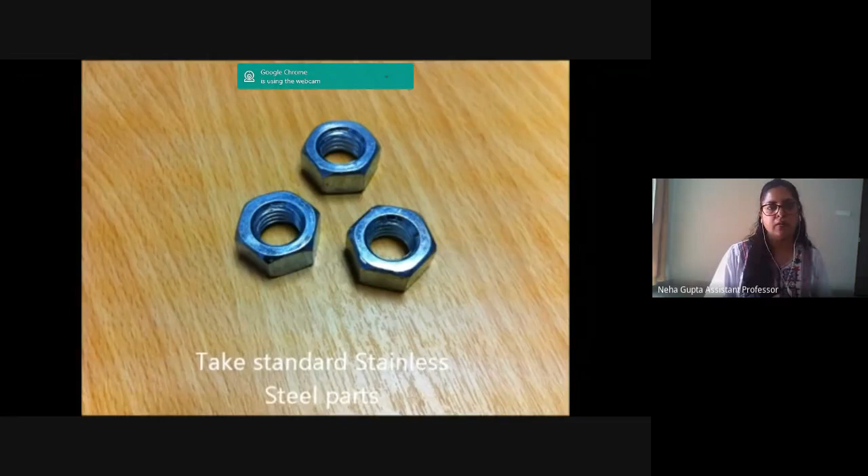So this is your laser 3D printing technique. So your target is to develop a metal lattice structure. So this is the base material. On this platform, you have placed your base material on which the structure has to be created. Here is your metal powder, brown one. So you will prepare a CAD model in your computer and laser is coming.

So what they will do? They will raise this platform and the powder from this platform will be taken to this one. So one layer of powder will be sprinkled on this one. And then laser will come and it will heat the powder. Wherever the laser will move, the metal powder will melt and it will create a structure. So that structure we are developing here. So laser is moving, it is heating the powder. Wherever the heating is done, the structure is being created.

Next layer of powder. So slowly, once one set of laser heating is done, again one powder layer is being created, again you sprinkle, allow laser to move. Layer is being put, now you will heat it. Then again layer of powder is being put, then again you will heat, and once the final structure is ready, simply remove the excess powder. So the best part is you can reuse this metal powder again and again.

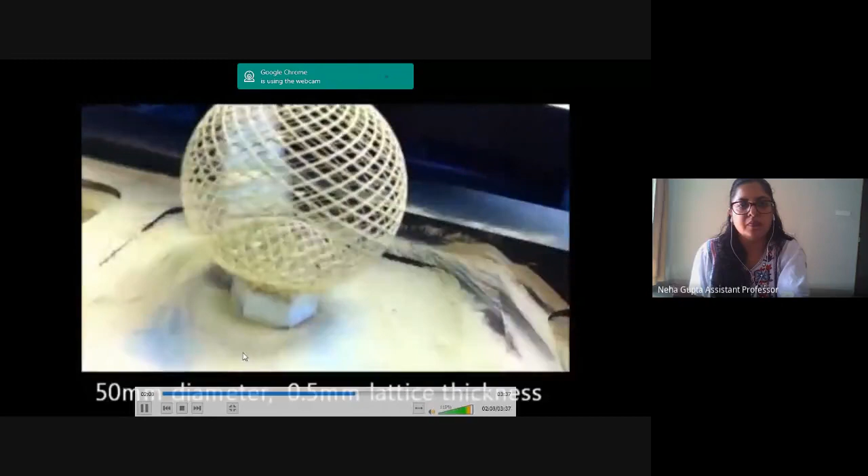So on this platform, we have created a lattice structure, regular arrangement of cells. And later you will see inside this big structure, there is a small structure also. So whatever complex structure you want to develop, 3D printing gives you best solution. Right? So a structure inside a big structure.

Okay. So using this 3D printing method, you can easily achieve development of metal lattices. Now the problem with this technique is the cost of these kind of 3D printers, it is in crores. Okay, and usually people have very less access to these kind of facilities.

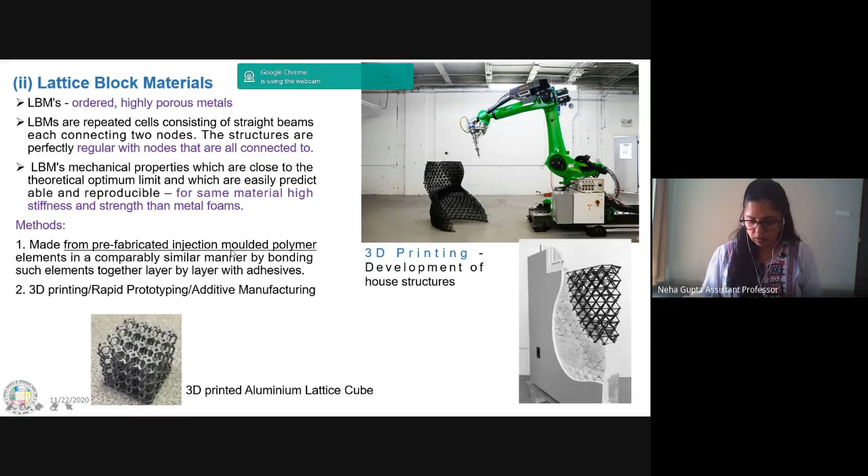So what we have done in our lab, we are using an indirect method of developing these kind of metal lattices. So what my students have been doing, they are using the advantage of investment casting. Please again remember this casting method. In investment casting, there was a polymer template. In that polymer template, you were adding some sand or any other ceramic, and then you have to remove the polymer, and then you can cast the structure.

So now what we will do, so there is another BTech group that is working on this one. So they have tried to work with the sand method, in which the ceramic was sand. In another case, they were working with plaster of Paris. Then you can use wax also, and you can use NaCl also.

And what the students have found is it is best to use NaCl ceramic, because if you are working with sand, you have to tap it off. But if the structure was very big and complex, then at the center of the structure, the sand could remain. But what happens if you're using NaCl? NaCl will give you,

now, anything you want to say?

Okay. So if you're working with an NaCl structure, you have to simply take water and dip the structure in water. So wherever there is NaCl, it will simply get removed by dissolution. So this is the polymer template that the students have prepared using a general 3D printing machine. And a polymer 3D printing machine comes within 50,000 rupees. Okay, so you can purchase that 50,000 machine and you can develop a polymer template in that.

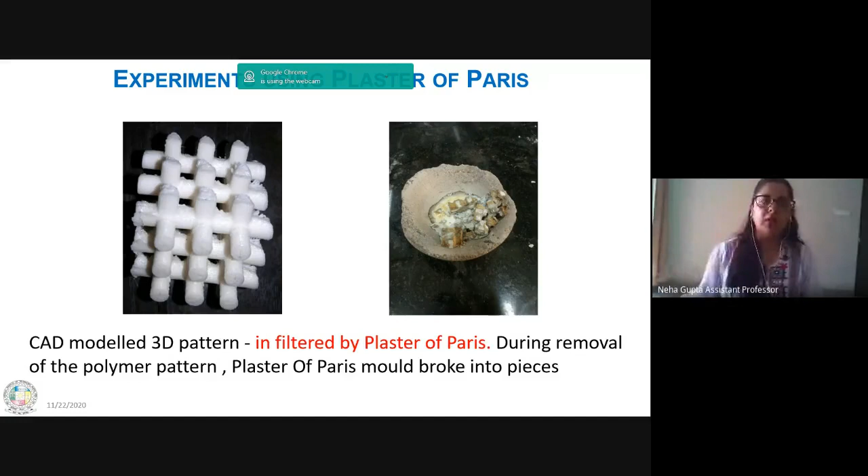Now you can fill these pores with some ceramic, let us say NaCl. Heat the structure, get rid of the polymer. What will be left? Only NaCl. Then you can simply cast your metal using this technique. Okay, and the final metal lattice can be developed. Okay, so these were some of the studies that people have developed using polymer structures.

Dr. Neha? Yes, sir. Sorry to interrupt, but students have some other assignment after that, so we have to finish it within 10 minutes. Okay, then I can go with the future applications directly. Okay, okay. Thank you. So I have already shared these slides with you. So because of the time constraint, you can go through those slides. And if you have some doubts, we can discuss it later on. Okay.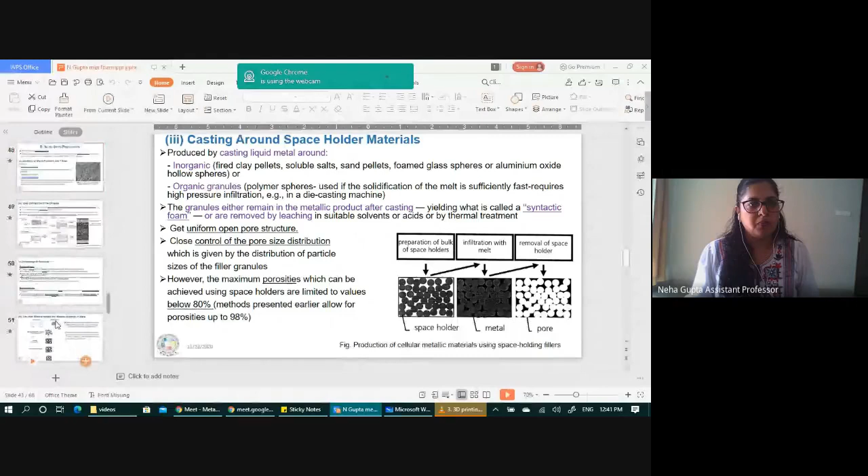Now, let us see where people are working currently, future applications of these materials. With these kind of lattice structures, people are trying to develop mechanical metamaterials for mechanical applications. Now, first let me give you an example, then you can try to correlate with what I'm going to say. So, mechanical metamaterials are those materials which can change into any predefined shape and have some machine-like functionalities.

For example, earlier, if I want to have a latch system, this was the latch system that people used to work on. But now they are using mechanical metamaterials. For example, in the second diagram, this is your metamaterial latch. It is the same material, only you have created a lattice structure. In the lattice structure, in each different part, for example, here the cell is different. In another section, the cell is different.

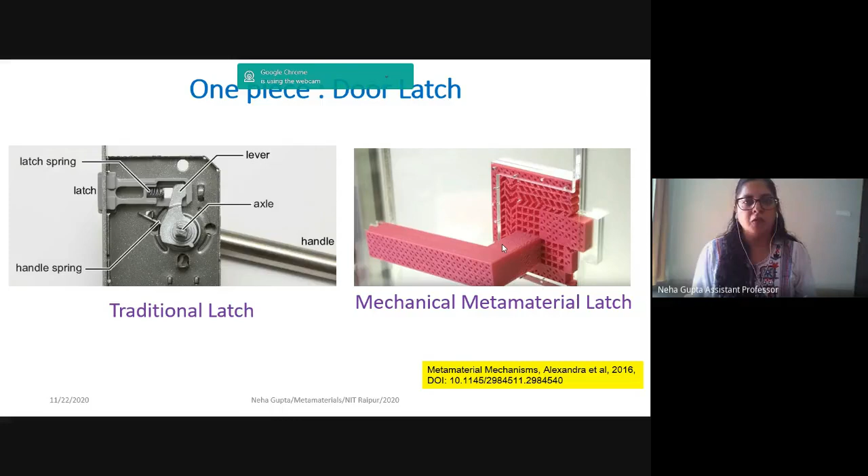So you will see at different locations, they have simply modified the cell so that all these different functionalities, for which earlier you had to use different components, can be accommodated in a single structure. For example, here in this zone, they are working with this cell. Okay, so this is one kind of cell, this is another kind of cell. And when they applied force, they found the joint simply broke.

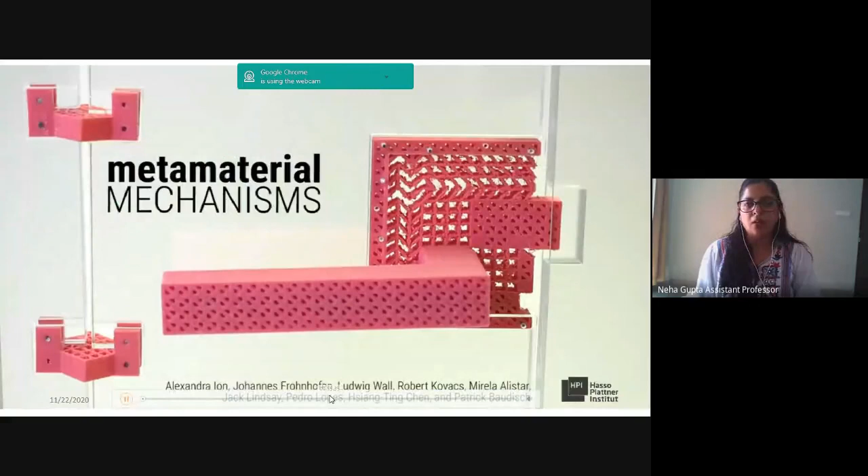And when they added a single layer of this one attached to this one, even after application of load, the joint remained as it is. So like that, they have modified the structure so that the load can be handled using the same material. And in this video, you can appreciate how this latch is taking advantage of this. Okay. So all the functionalities of the latch using the same material, you can simply change the functionality.

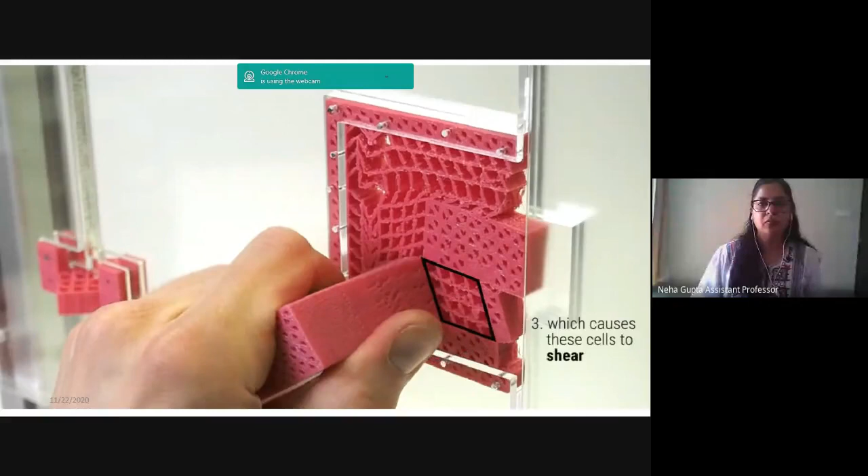Right. So this area I was talking about earlier, this zone was getting broken, and just by creating a support cell structure, they are able to modify the mechanical properties. So these kinds of structures people are currently working on. And if you want to give code to these structures, then they have also developed digital latches.

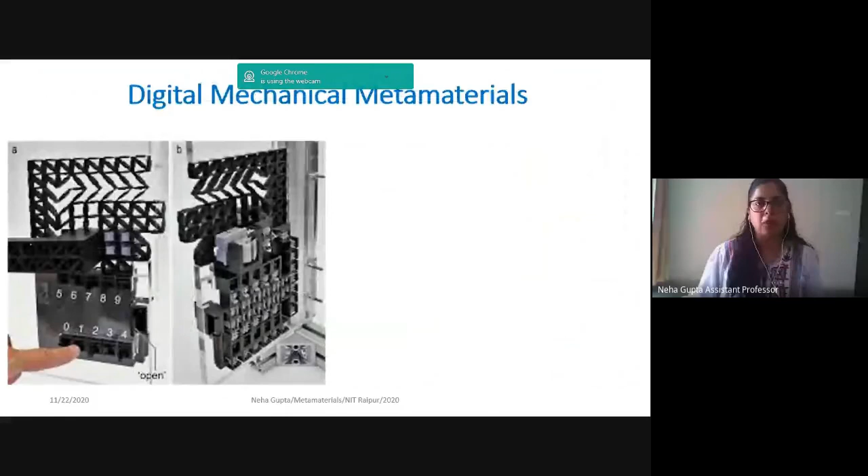Okay, for example, you can look here. It is locked. Now you will enter a key and it will unlock. Let us see at the back what is happening. So these are the different lattices. Okay, cells. Okay, so this is how the code is getting transferred so that you can lock or open the latch.

Okay, so these are some of the mechanical metamaterials people are working on using lattice structures. So I'm again focusing that I have discussed metal metamaterials, but you can always work with other materials also. Okay, then one more example is field responsive mechanical metamaterials.

So if you want to transfer load automatically, this is a polymer lattice structure which is hollow in nature, and now they are infusing the structure. They are filling the pores using some conducting ink, magnetic ink.

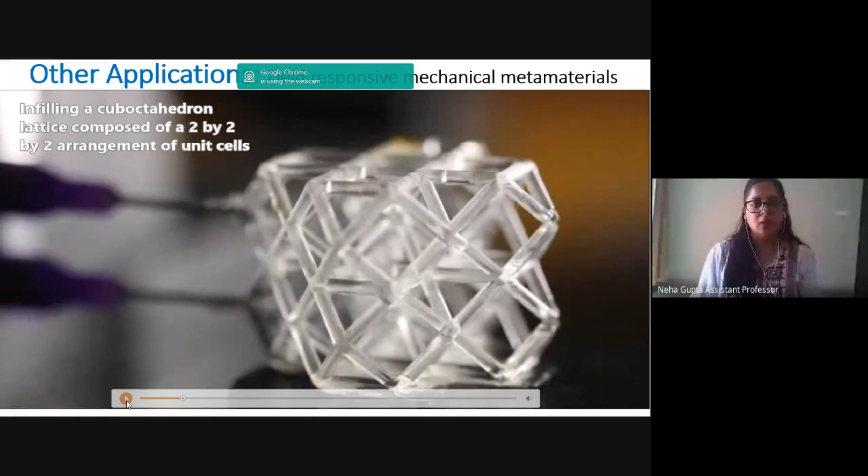Okay, and now this is the load, and they want to transfer this load to some other place. And here is the magnet, and as soon as they remove the magnet, just simply observe what happens. Right? So these kinds of applications you can work on using lattice structures.

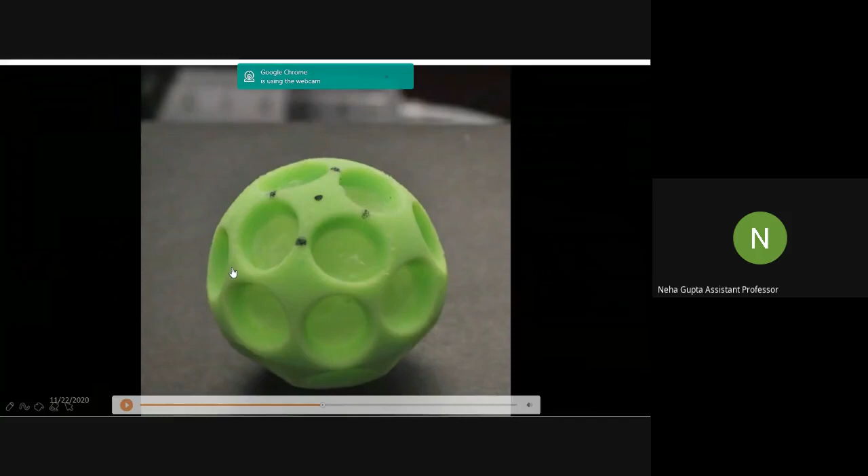To a small ball. Okay, so shape changing materials you can develop by changing the cell. So this is your square that I was talking about.

And this is one more example of foam material. So if you take shape memory alloys, you can develop foam out of it. This foam can change shape, and they can also weld. You apply force, they will weld. So this is another example of foam material.

There is a lot of noise coming. It was from my side. Okay.

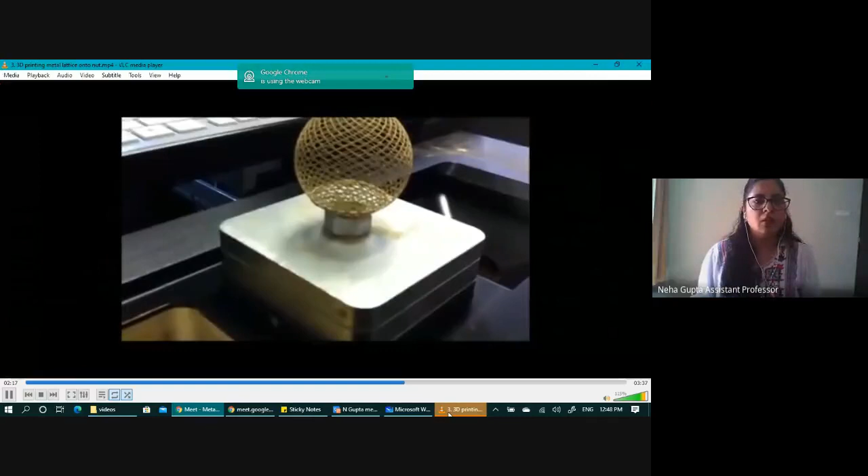So that was shape-shifting material. And this is my last example to you. These are known as origami lattices. Origami lattices: this is a simple paper folding technique in which we create lines on the paper, we fold across those lines, and we create shapes from it.

So what happens, for example, if I want to create some bone replacement materials? The general thing is I will print my 3D metal lattice as a bone shape and I will use it for that. But the problem is, if I want to have tissue growth inside it, I cannot approach the very center of the material. But if the structure was flat, then I can easily access the center portion. So these are those origami lattices.

Please observe this video carefully and you will appreciate that you can prepare very complex structures, and though you are developing very complex structures, you can go into the inside of the material and make whatever changes you want to do. So these are the origami lattice structures, regular arrangement of cells.

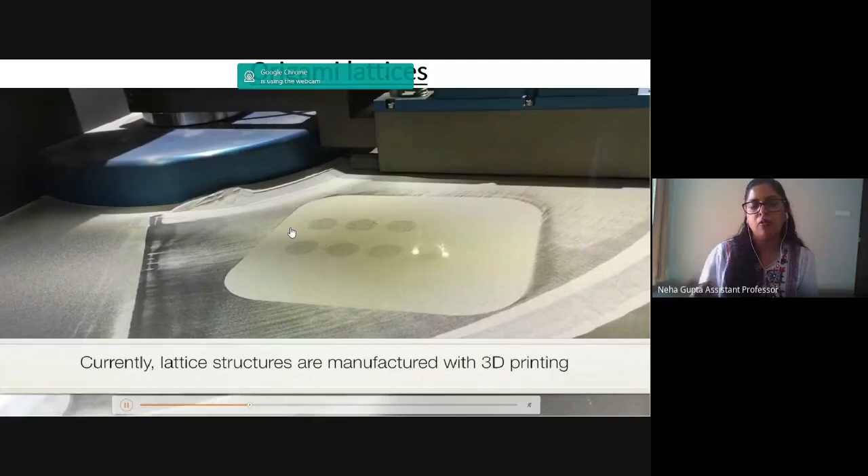This is the bone replacement part, medical implant. And they have printed it. These are laser 3D printed parts. This is the laser printing technique; you can directly print the part. And on this you want to have tissue growth or whatever you want to do. Okay, this is another implant.

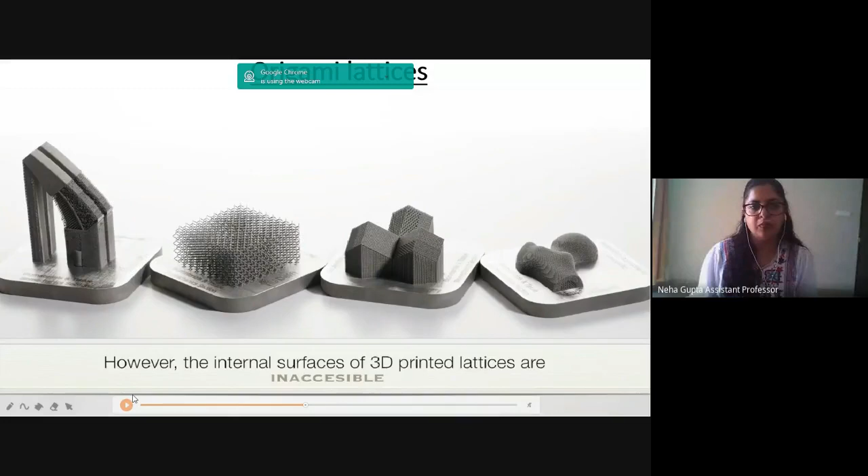Right. So if you want to access the internal surface, and let us say you want to grow some tissue and understand how that cell or tissue is growing at the center of this lattice structure, what can you do now? You can use the paper folding technique. So on a paper, you create some lines using that simple Japanese technique. You can create a structure by simply folding the paper across those lines.

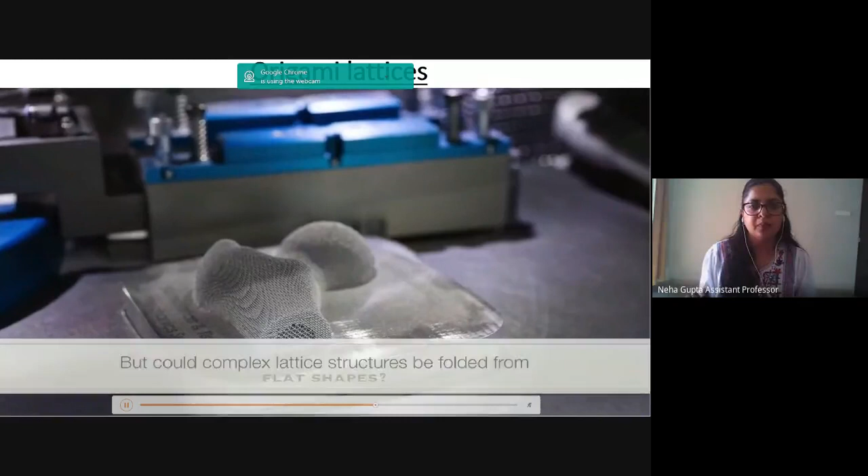Okay. So the same thing we have to do here, and we have to prepare this kind of complex structure. Initially it was flat, and after application of some load, you can create these kinds of complex structures. Simple folding of the lattice structure to create a complex part. As soon as they release it, it will take a complex shape.